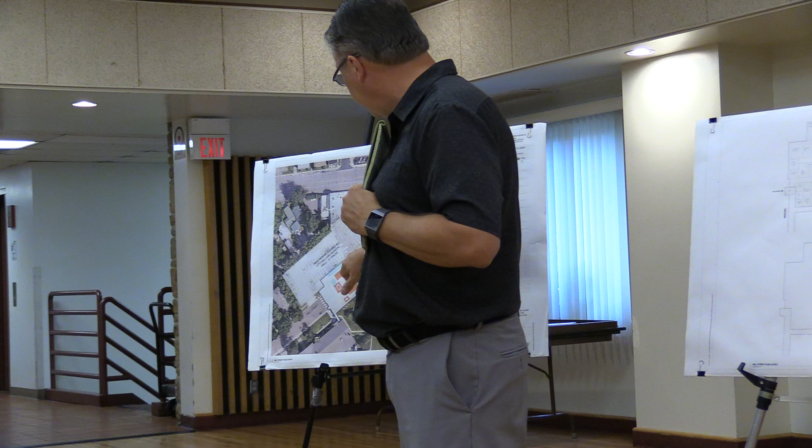So first of all, what we're looking at here is called option 5. It shows a 22,500 square foot building, and it shows it right on Mill Street. I'll go through some pros and cons of that. We have shared parking, shared with the Murzyn Hall operation, and then also shared with City Hall operations. Really what we're viewing that as is the primary uses of these 2 don't correspond at the same time. Largely a lot of Murzyn Hall activities occur when City Hall is not open and vice versa.

Then we looked at doing some things as a potential along 40th Avenue. 40th Avenue is the primary corridor. It's a county roadway, it's a county state aid highway, and that is being looked at for complete reconstruction here, probably in about the next 3 to 5, 3 to 7 years. That was one of the things we wanted to take a look at, just in terms of having something that would complement that type of improvement.

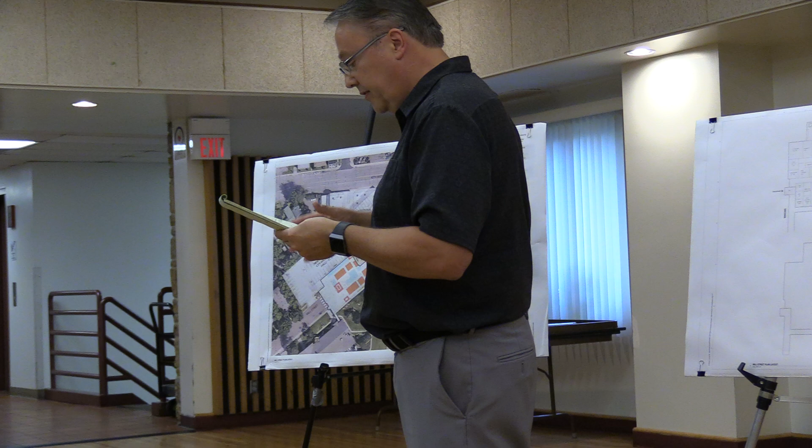The building layout itself, as I mentioned, there is a connection into Murzyn Hall, and that creates somewhat of a campus feel, having these 2 buildings together connected. We listed the closure of Mill Street as both a con and a pro. From the pro perspective, it closes a skewed intersection. This is something we've had conversations with the county about, just in terms of this access and having it on a county state aid highway. So that'll be continued conversations whether this happens or not.

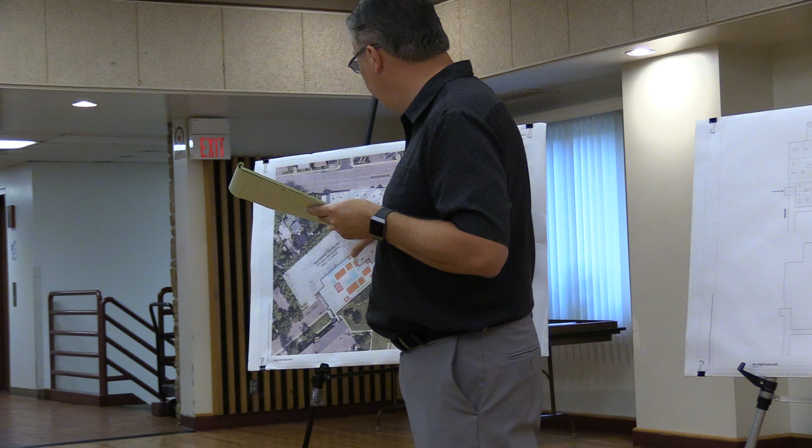From a pro perspective, recognizing the closure of Mill Street, we did provide another access that lines up with an adjacent street through this site, with a wider drive aisle so you can still get out to 40th. Citizens can still get in and park off 40th Avenue. We're maintaining that, but lining it up from an adjacent street and getting rid of the skewed intersection.

One of the things this does is allow, if the city felt the need down the road, for some future expansion — it provides additional land.

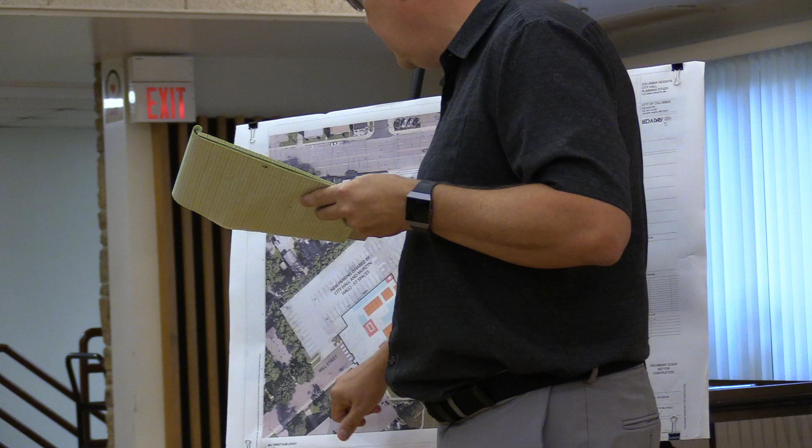The other thing this does is bring recreation into this building and allows for updating and remodeling of Murzyn Hall. The last major update of this facility was in 1989. For how popular this building is, I think an update could certainly be considered — both in terms of space and the amenities here. That would be some other future development.

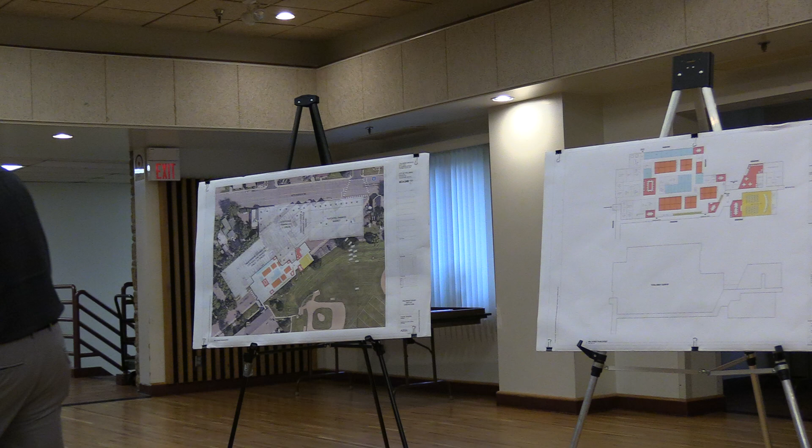I think the cons are on these sheets, which are up here and back here — over there, on the table. So there's a summary sheet.

We didn't get into a lot of detail on these other than recognizing them, but I think they can be considered a con for any type of development.

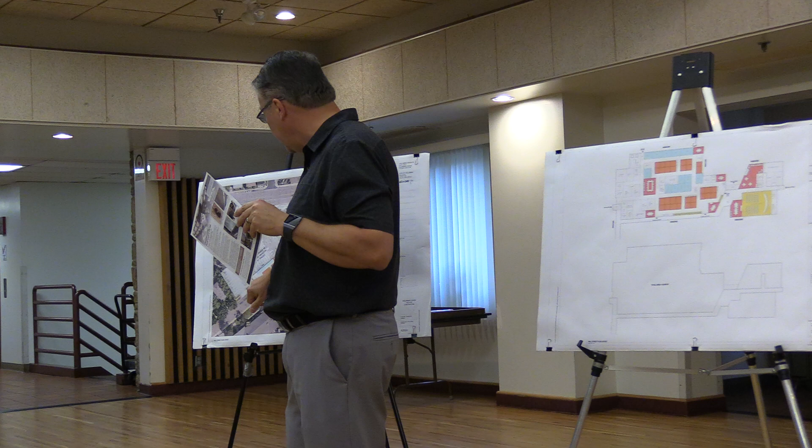Probably one of the biggest things — I talked about the closure of Mill Street as a con, but also, quite frankly, there's just the cost of a standalone building like this.

At this point, I'm going to turn it over to Aaron to talk about the other site that's being looked at, and also about the budgetary numbers for both of these.

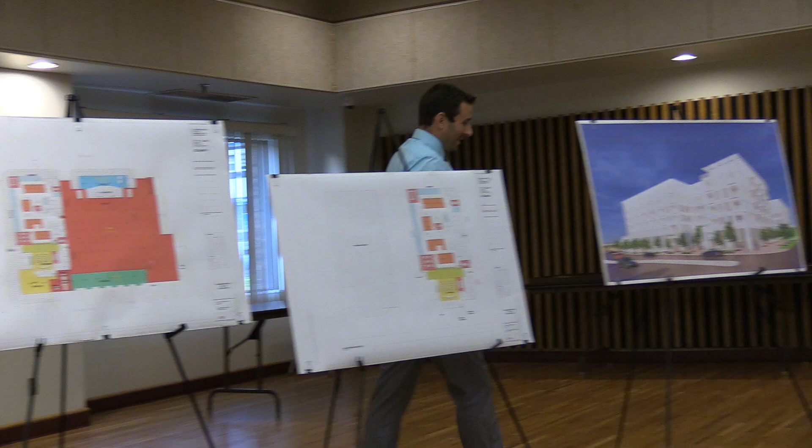I can make my way through this. Not the most visible for everyone, so I apologize, but we'll do our best.

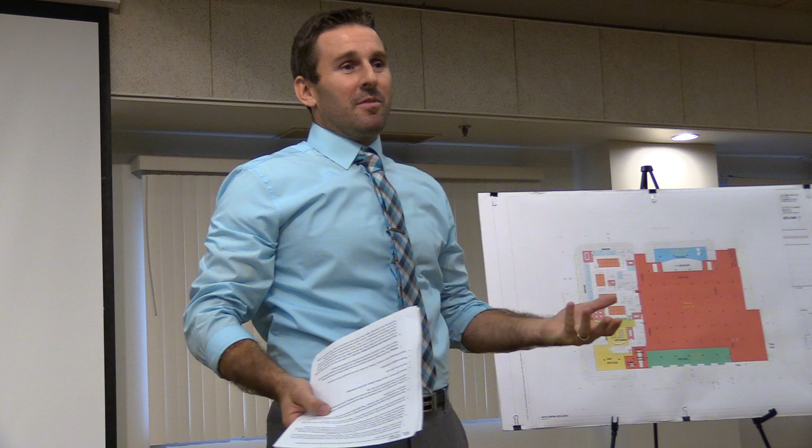Aaron Chirpich, Community Development Director with the city, taking it from where Kevin left off. I wanted to explain the evolution of the other project site and how we came to have this conversation this evening, to try and determine where we might go and how this entered the picture.

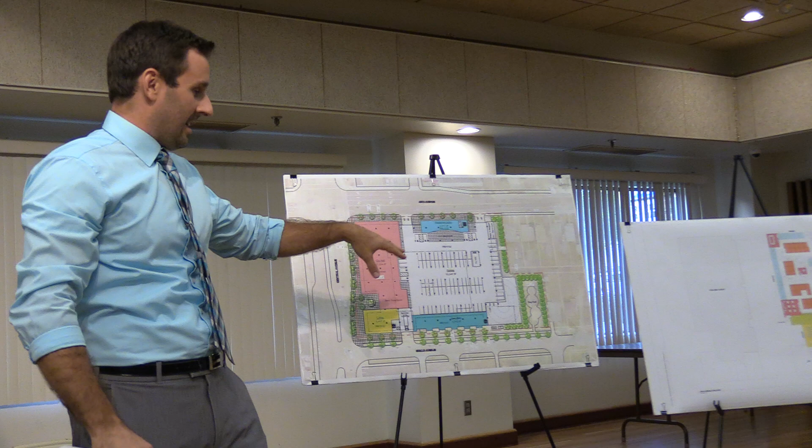Just for quick reference, the site we're talking about is at the intersection of Central and 40th. It's currently occupied by the Northeast Bank building and the municipal parking ramp. Also included in this project site is a single-family lot the city had owned for years that is now a stormwater improvement area. So that's where we are in the world.

That site has been a priority redevelopment site for the city for several years, for many reasons, but most recently because it sat vacant for the better part of six years and nothing happened. So we've wanted to do something there for many years.

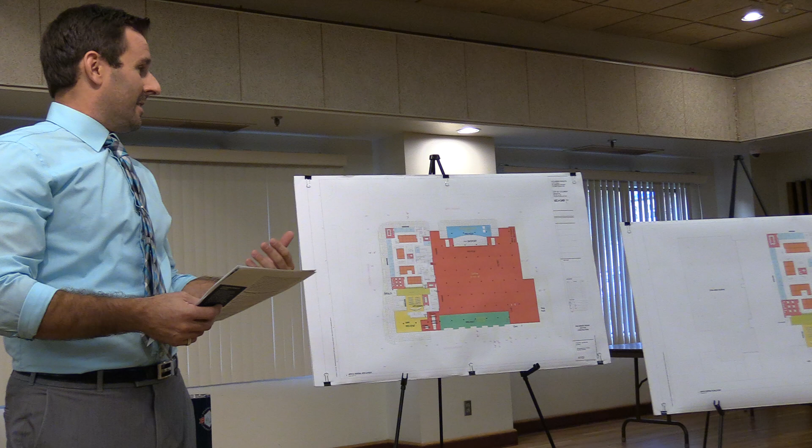There's been a lot of different ideas and iterations of what might go there. But more recently, the city took a more proactive role in securing the future of this site by acquiring the Northeast Bank building earlier this summer. So we now own that site as well as the adjacent municipal parking ramp. Together, that's the total project area we're discussing.

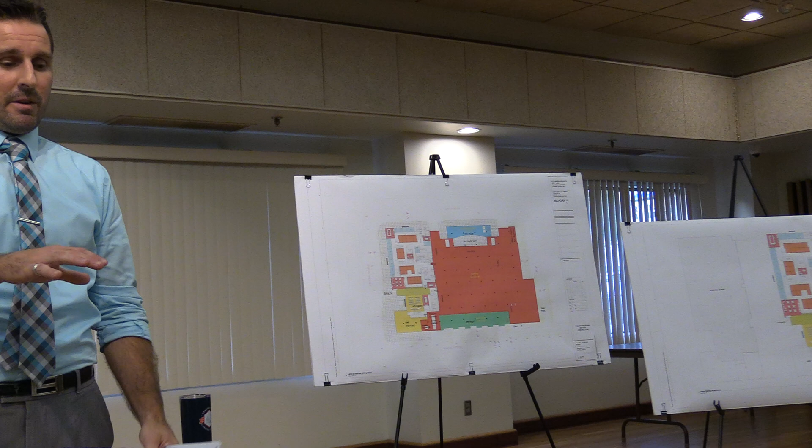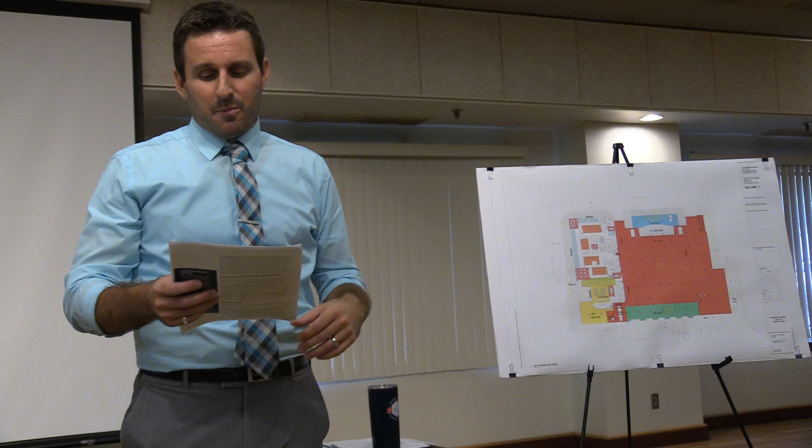Recently, the city went through an update of our comprehensive plan, and it has guided this site for transit-oriented development, given its proximity to the central bus hub and a busy commercial corridor. Transit-oriented development standards include an emphasis on a mix of retail, office, and higher density residential uses, and also prioritize pedestrian scale improvements with any development in that district.

With that in mind, and some of those guiding principles, the city engaged the development community about a year ago, in summer 2018, for a developer roundtable to talk about this site, seek feedback, and gauge interest. From those discussions, one developer stood above the rest, Alatus, and that's who we're working with on plans for the site. No matter where we decide to locate City Hall, they are under contract with a preliminary development agreement for the property.

They rose to the top of the list because their proposal included a vertical mixed-use concept with luxury apartments, ground floor commercial, and the pedestrian amenities we were looking for, hitting all the priorities set forth in the comprehensive plan for this area, which was really important to the city.

It's always nice when a developer sits down with you and asks what you'd like, takes that feedback into consideration, and proposes a project in alignment with it. That's how we attached ourselves to that development team, compared to other proposals that were just housing predominantly, or some that included reuse of the existing building and retaining the municipal ramp. Alatus brought the full package together.

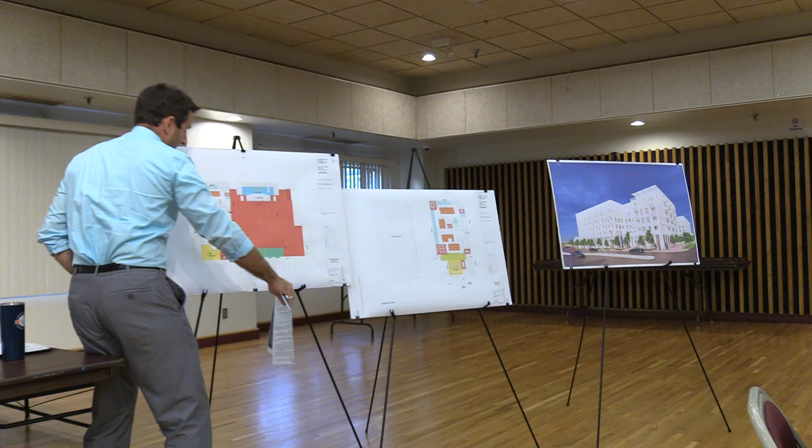It might be hard to see from where you are, but Central Avenue and 40th are at the top, so north is up. The City Hall would be at that corner of 40th and Central under this scenario. On the corner of Gould and Central would be a retail space, programmed as a cafe right now, likely a coffee shop or small restaurant.

Behind these amenities on Central, the square footage is almost 21,000 square feet of City Hall space. Behind Central is parking; underneath this red area predominantly is surface parking for City Hall staff and residents visiting for city use, plus additional spaces for the cafe and some for apartments. There's a ramp you can't see in the corner, but underneath the main floor would be proposed underground parking for the residents, their primary parking area. So underground parking, hidden surface parking, and then 5 floors of housing above.

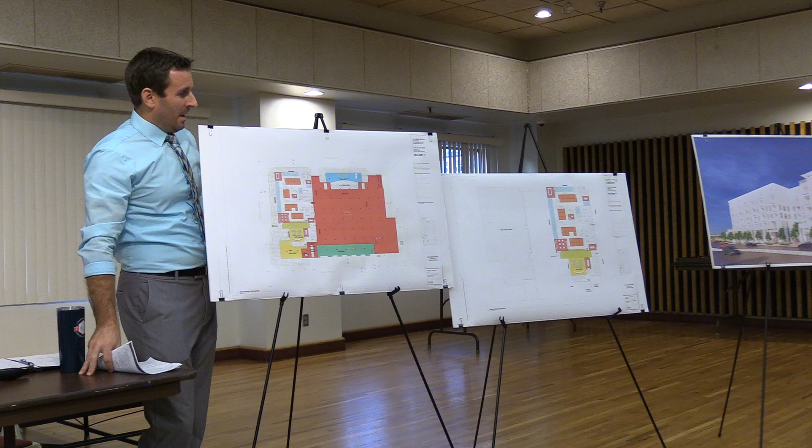They're luxury apartments, a product we don't have in the city, ranging in unit count from 250 to 270 at the moment, with high amenities, top of the class apartment facility on top of City Hall and retail. That's it in a nutshell from a site perspective.

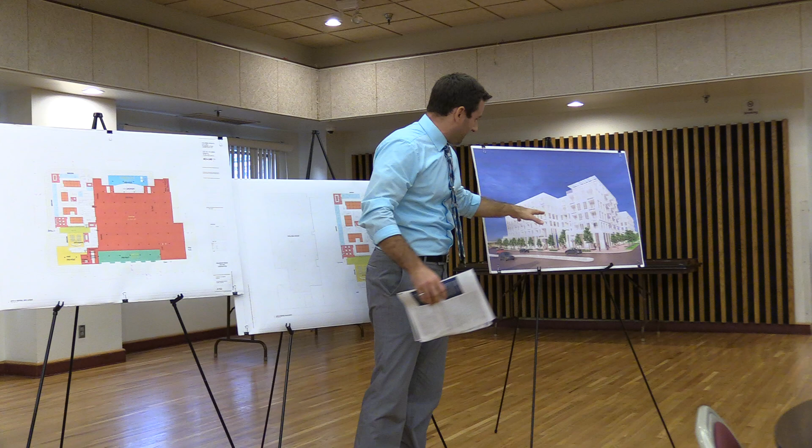There are some renderings over here showing what the view from Central Avenue would look like. They're not very embellished, just very plain at the moment, but City Hall is at the corner with its own entrance, and then the cafe space. This is a blow-up of those two entrances off Central, and a pocket park in between City Hall and the cafe, an indent in the building serving as a gathering space for the public. So hitting all the design elements important to us and putting it into a vertical mixed-use package.

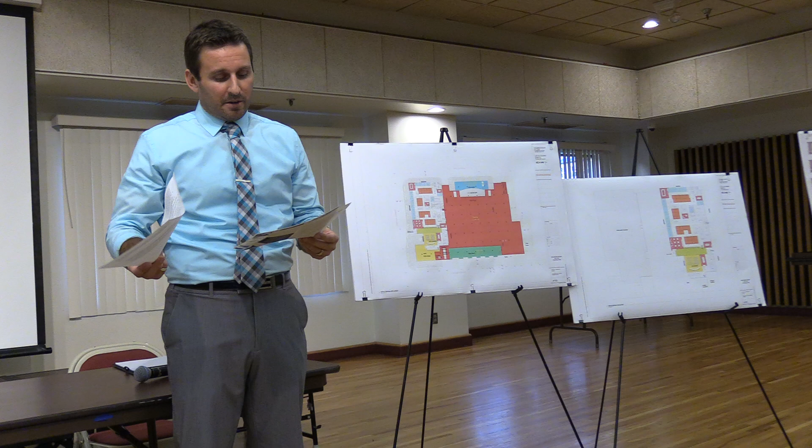So when it comes to the pros and cons, we've laid out a rolling list that we're developing. First the positives. The first, and most compelling reason why we're even discussing this cutting edge idea is that it significantly lowers construction costs for the city. We'll go through that in greater detail.

It lowers operational expenses. It locates City Hall in a prominent and accessible location, down the street from our library, across the street from the county services, so we're co-locating other public facilities and can streamline some of our services.

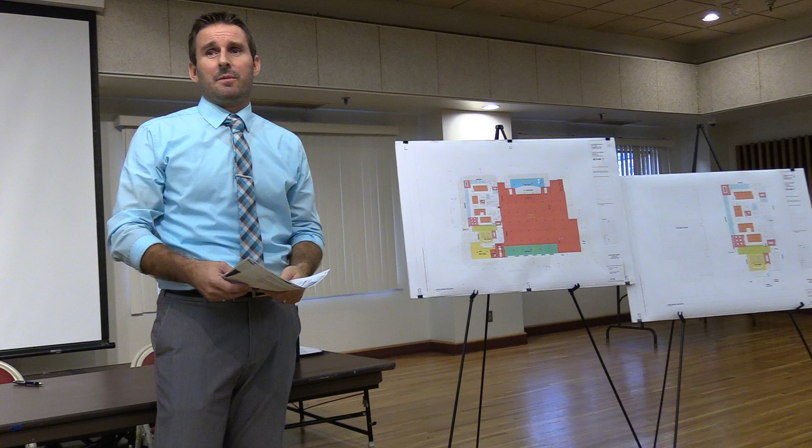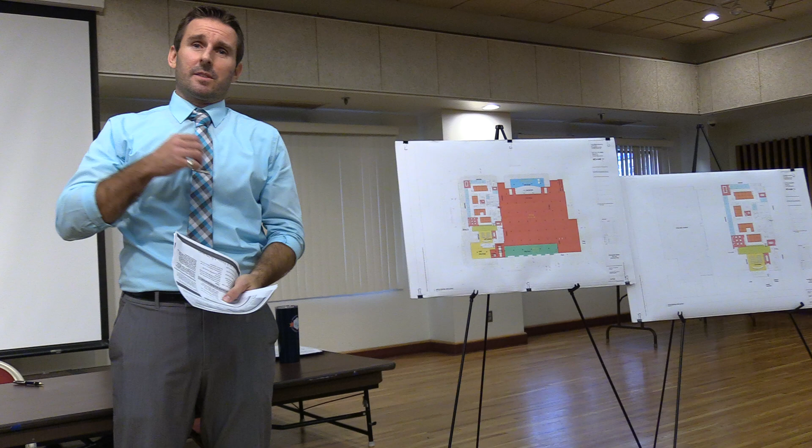It drives pedestrian traffic to Central Avenue, lowers costs to obtain a new City Hall, which frees up resources that we've saved for other projects and priorities, and creates a stable anchor presence on 40th and Central. It also frees up the current site of City Hall for future redevelopment and tax-base expansion.

When we discuss the cons, the predominant one that jumps out is that we're now sharing space and amenities with another user, an apartment and a cafe, which means we have less site control. We'd be making joint decisions on anything building related, and there would be key differences in that, like cross-access agreements and ongoing negotiations for any changes to the building.

So that really has driven the conversation about how we would live and cohabitate. We think they're manageable issues, but it's obviously significantly different.

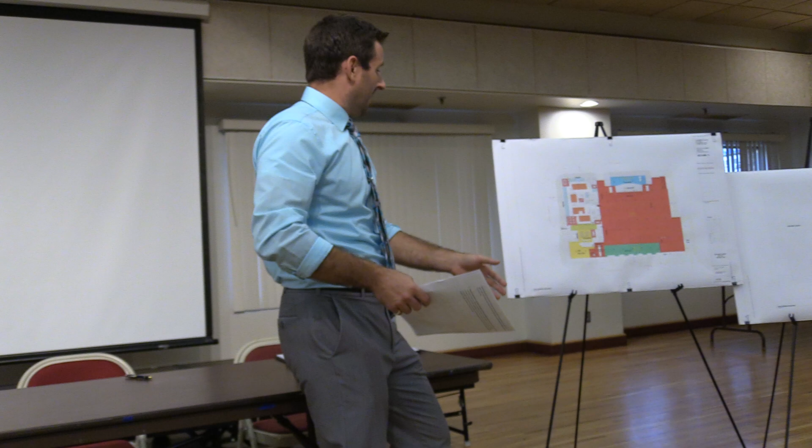Uses potential commercial space on the first floor. If City Hall doesn't go at this location, it opens up additional retail space on the first floor that could be utilized. We'll discuss it later, but it wouldn't be a one-for-one — we've got 21,000 square feet of City Hall, and it wouldn't be replaced with 21,000 square feet of commercial. It would likely be half of that, with storefronts towards the front, but it could offer more space for that.

It could certainly be considered an untraditional location for a city hall. There are only a few examples we've been able to find across the country. There are public-private facilities elsewhere, but at this scale it's pretty rare. Waconia has a city hall attached to housing apartments — probably the closest example — but there's a unique project in Florida that's eerily similar to what we're contemplating here, which may lead us to believe it's a strategy other communities are moving toward.

Finally, one of the bigger drawbacks: we have little to no room for expansion. So if we design this space, we have to live with it. Efficiency is the goal of everything we do anyhow, but we would really only be able to take over the cafe space if we absolutely had to at some point in the future.